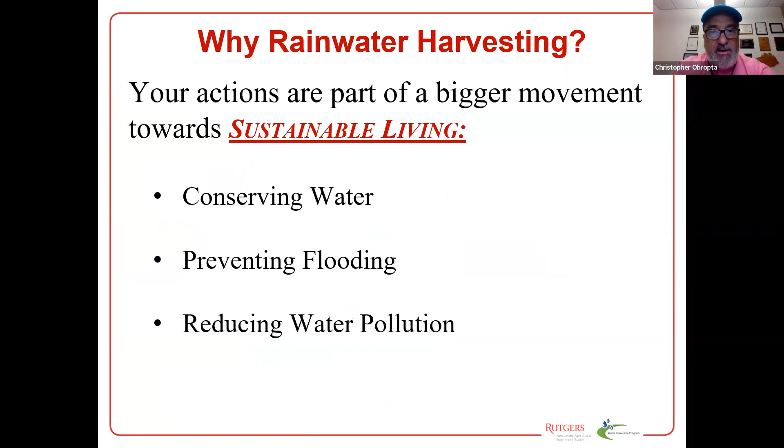So today we're going to talk about rainwater harvesting, and really this is a topic that's become very, very popular. Focus a lot on this whole sustainable living aspect, and we'll talk about each one of these.

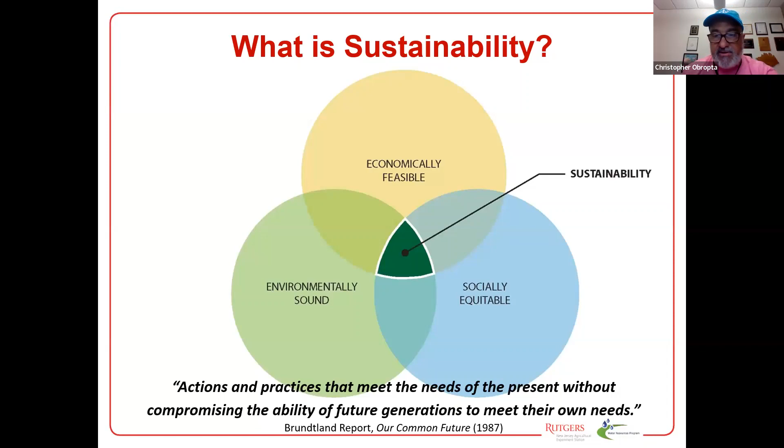Sustainability from a standpoint of what we're trying to accomplish in our lives, I think, has really three components. There's an economic component, there's an environmental component, and there's a social component. Where these three bubbles kind of overlap is in that middle, that's the sustainability. So if you're thinking about the economics, the environment, and the social components, and you're doing it the right way, you can have a sustainable future. And that's what this is all about, rainwater harvesting.

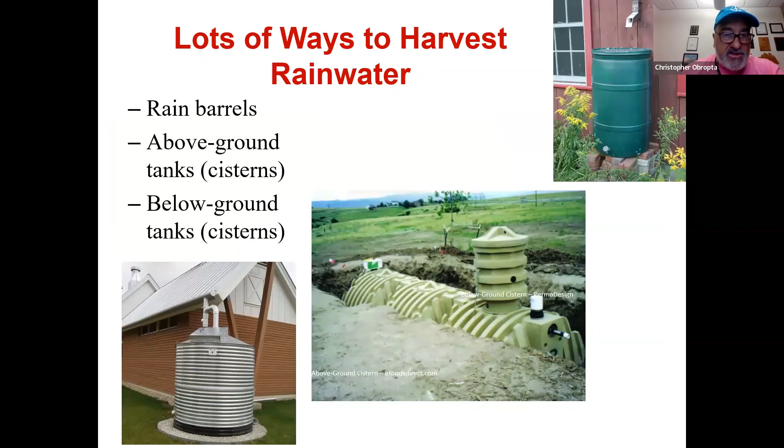So lots of different ways to harvest rainwater. We've got the rain barrels, which probably a lot of you have. We have these underground cisterns, and then we have above ground cisterns. So now the rain barrel is a small feature, it's about 55 gallons. These other things could be much, much larger in size, and I'll show you more about that in a minute. So the first thing we're trying to do is we're focused on conserving water.

New Jersey is a water-rich state. We get over 40 inches of rain a year, but we are also the most densely populated state. About 50% of the water we use comes from groundwater. The average resident uses about 100 gallons per day, and in the summer that jumps up to about 185 gallons per day. So when you couple what the people are using, 9 million people in New Jersey are using, coupled with the 10,000 farms in New Jersey, we have a lot of water being used in the state.

Now, what's interesting is the climate's changing in New Jersey, and I'm sure you've heard about that. One thing we're being told about climate change is that we're going to get more intense storm events, followed by longer dry periods. So for example, it'll rain on Monday, we'll get maybe 2.5 inches of rain, and it may not rain for another 2 weeks. So that's what we're going to see as the climate continues to change, those longer dry periods between the rainfall events. So making rainwater harvesting something that we might want to consider a lot more in New Jersey.

So we're trying to promote this sustainable lifestyle, prevent water pollution. If we're capturing water in a tank and not letting it run across the ground and picking up pollution, carrying it into our rivers, that's a good thing. We can extend the life and reliability of our septic systems and our public and private infrastructure. And then the other thing is it postpones the need to fund bigger water projects in the state.

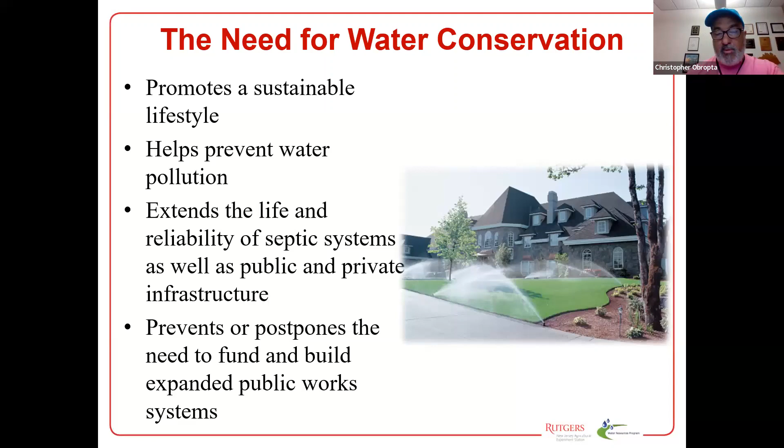So if we can, through conservation and rainwater harvesting, reduce the amount of water we use, then we have to build fewer reservoirs and fewer pumping stations and things like that. So it makes it a little bit more economical on a statewide basis.

So how much water can we harvest from one rooftop? Here's an example of a 40 by 20 foot roof, 800 square feet. One inch of rain gives you about 500 gallons of water. Now the problem with that is your rain barrel only holds about 50 of those gallons, so if you want to harvest all that water, you need something a little bit more than just one rain barrel. But on an annual basis, 42 inches of rain a year, you're getting over 20,000 gallons of water that runs off that rooftop.

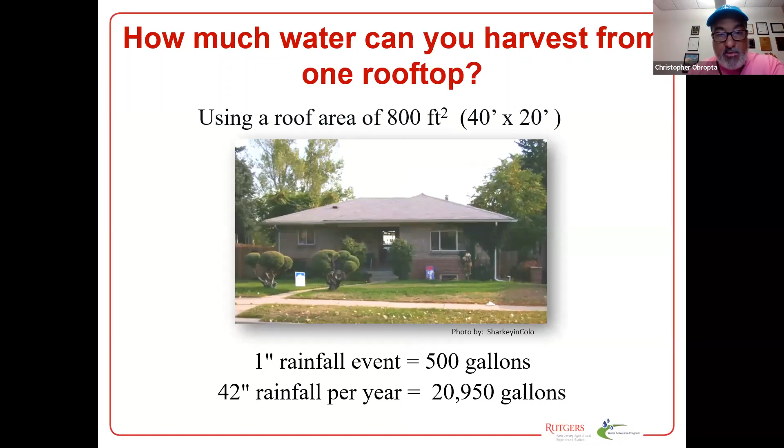Okay, lots of other ways to conserve water. So EPA actually came up with this thing called WaterSense. You know how they have something very similar for energy? So now they have this for water. So when you go to buy a toilet or a washing machine, look for that WaterSense logo, and it tells you that that product is actually better for the environment, conserves water, doesn't use as much. So very much similar to the energy savers stuff that we have.

So when we think about conserving water, adjusting watering for conditions - how many times have we driven through a development and seen a sprinkler going in a rainstorm event? Not a good idea. Using native plants - native plants are adapted to this climate, and we have a talk coming up in June on native plants. Very important, because they use less water, they require less chemicals to survive, and they do much better. Putting mulch around the plants to hold the moisture in place, very important. And then watering early in the morning - deep root watering in the morning really saves a lot of water. When you're irrigating with the sprinklers at noontime, a lot of that's just evaporating.

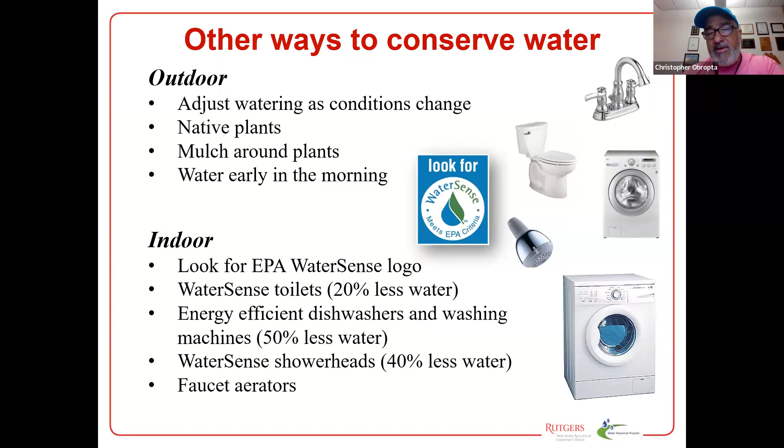You're just wasting water. Indoor, you look for the EPA WaterSense logo, whether it's a shower head, a washer, dryer, or a faucet, and these tend to use a lot less water, a lot more energy efficient. So these are things that we look at - faucet aerators, things like that. A lot of people have this already in their homes. I know that low flow shower head can be a pain in the ass sometimes, but it's good for the environment and uses less water.

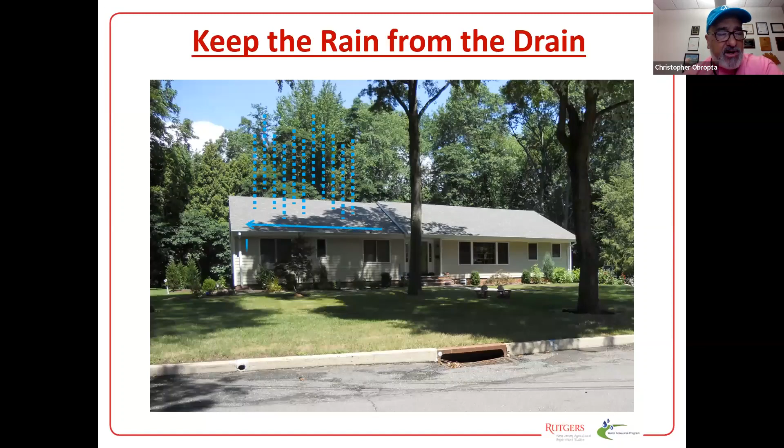So preventing flooding is another issue with rainwater harvesting. Now, like I said, we're not harvesting a lot of water that's going to prevent flooding, but every drop that we can hold back is going to help out. Here's a typical house in New Jersey, and we can see it rains on the rooftop, goes down the gutter, goes down the downspout, it's piped all the way to the road, and then goes into the catch basin. Every drop of water that hits that roof winds up in that catch basin, winds up in a stream.

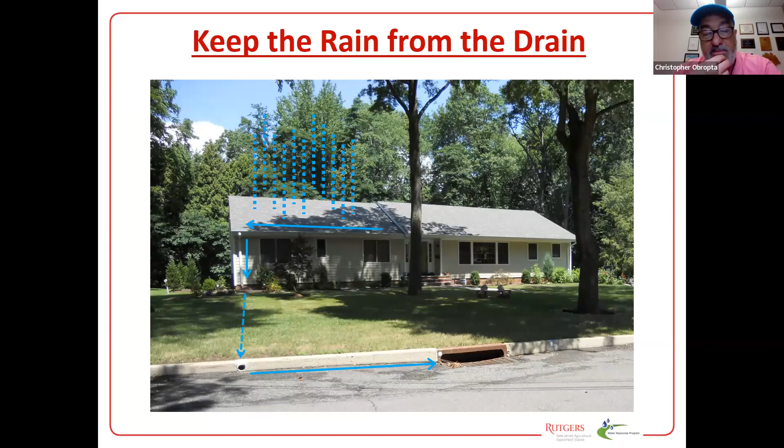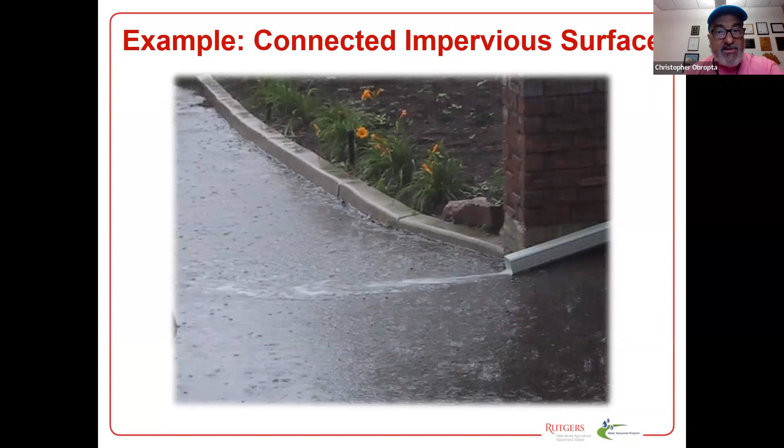We say this roof is directly connected to the stream, so we want to disconnect that. One way is we can cut that downspout off and let the water run across the lawn - the lawn will absorb the first half inch, maybe inch of water. Another way is to install a rain barrel to capture that water. Here's another example where the downspout's going onto the driveway, running down the driveway, going into the road, going into the street. So once again, the rooftop is directly connected to the stream, and we're trying to prevent that - that's a big thing we're trying to do in New Jersey.

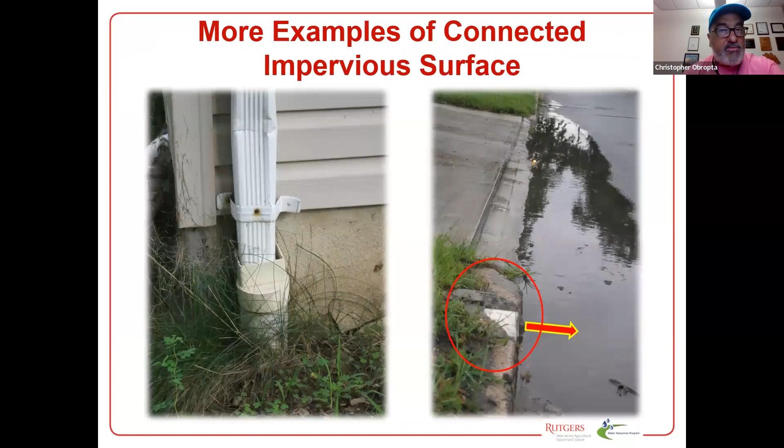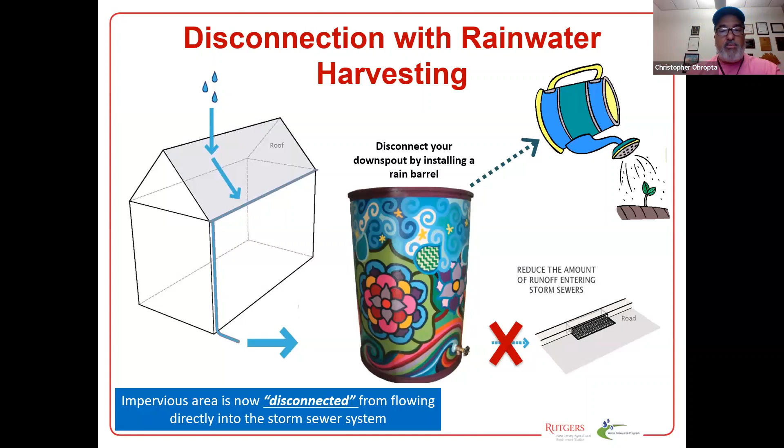Here's another example here, you see it's being piped out to the road. Not only is it a problem in the winter when it starts ponding on the road and flash freezes - you have issues there - but it also deteriorates the asphalt, ruins the road. So if we can absorb that water, the better off we are. So here's one way of doing it, with that rain barrel or cistern, something to that effect. So now it's no longer going to the inlet, it's going into the barrel, and then the barrel kind of overflows onto the lawn. The lawn will absorb the excess water. So that's what we're trying to accomplish here.

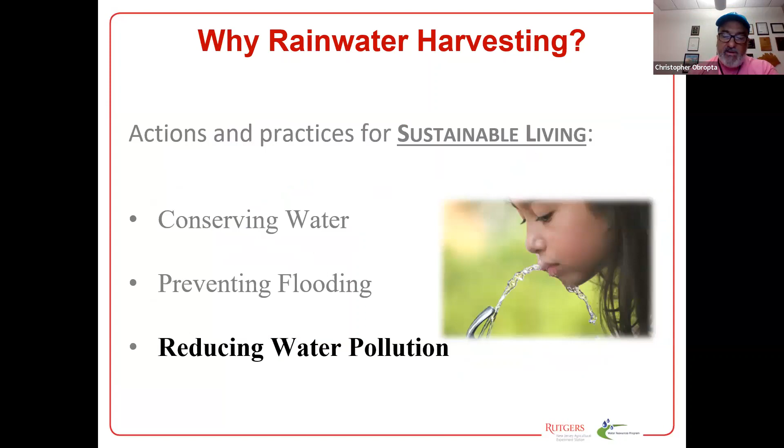The final piece we're looking at for rainwater harvesting is water pollution. The big thing with stormwater is it rains, the water hits the ground, and as it's traveling over the ground, it's picking up pollution and carrying it to the catch basin and ultimately to the stream. By harvesting that water, you're preventing it from running across the ground picking up pollution, and you're using the water instead. It's a way to stop and break up that process by disconnecting the rooftop, having it go into a rain barrel or cistern instead of running out across the lawn and driveway. That's what we're trying to avoid.

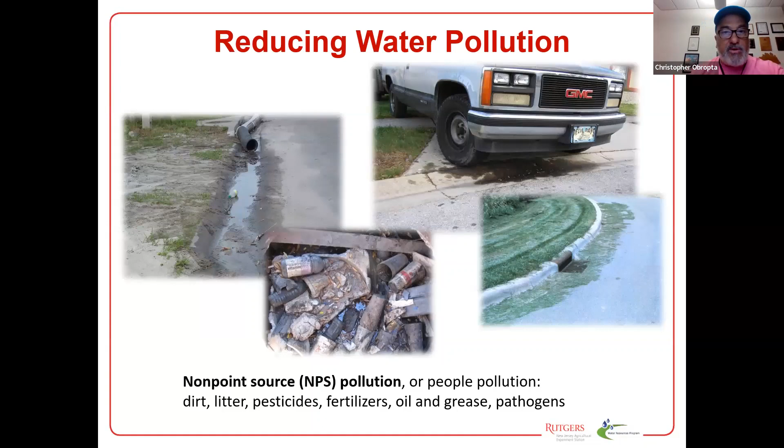Other benefits of rainwater harvesting: plants love the water. There's no salt or chemicals in it, and it has a slightly acidic pH, so it does very well for plants. A lot of people harvest rainwater in rain barrels and use it to water plants in their house, so it's not just outdoor use. Also, during periods of drought you can use that rainwater. With climate change, you're going to get a lot more heavy rainfall and longer drought periods between. So you'll have that harvested rainwater to water the plants, and you won't have to use potable water from the city, which has chlorine in it that isn't good for your plants.

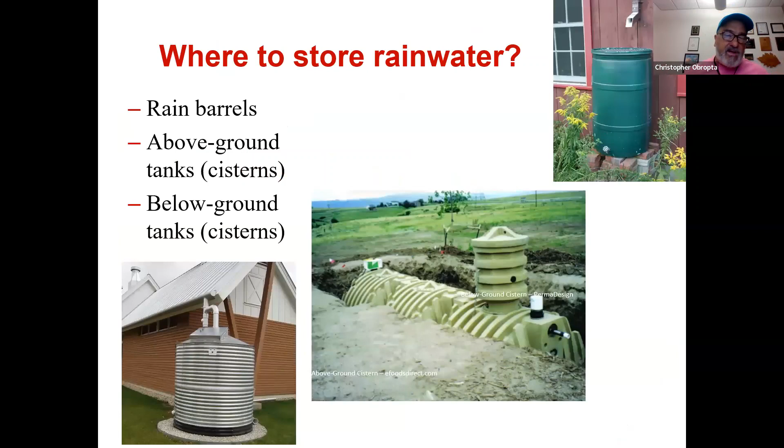So let's talk about rainwater harvesting systems. We showed you the slide already with the 3 different types of tanks we're looking at. There's lots of different types of rain barrels.

We used to do these workshops where people would come in and build a rain barrel—drill the hole, do the caulk, put the spigot in—and there was always some crazy person trying to squeeze two rain barrels in the back of their Prius. By the way, two rain barrels don't fit in a Prius, and I had to follow them home in my pickup truck, which is a bad thing. But we used to do these workshops all the time.

The problem was it's hard to get students to wash out those barrels. They're loaded with pickle juice and things like that—it's a very disgusting job. We found that an undergrad student will wash about 49 barrels before they quit. Then we had to haul the barrels all over the state, which required a trailer and a truck, and it became a very expensive proposition. But if you can find a recycled barrel, it's a great way to go.

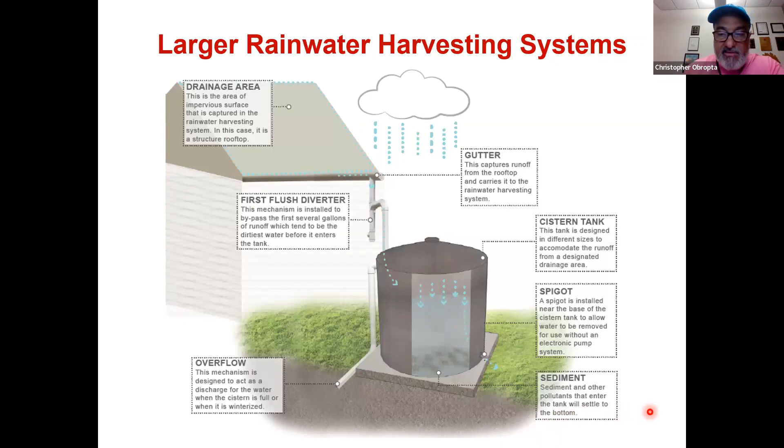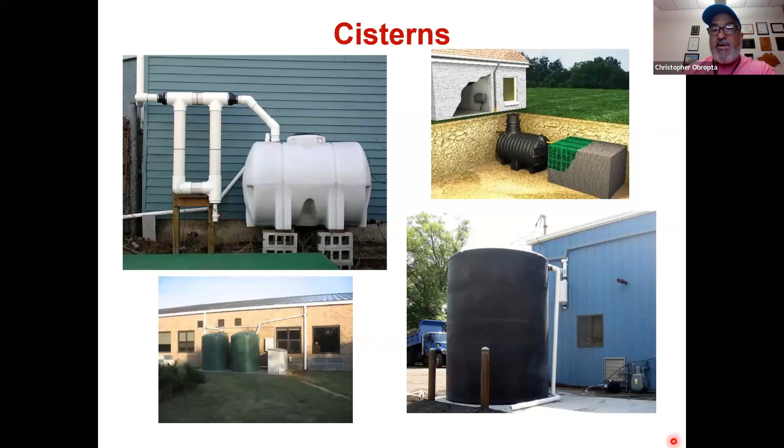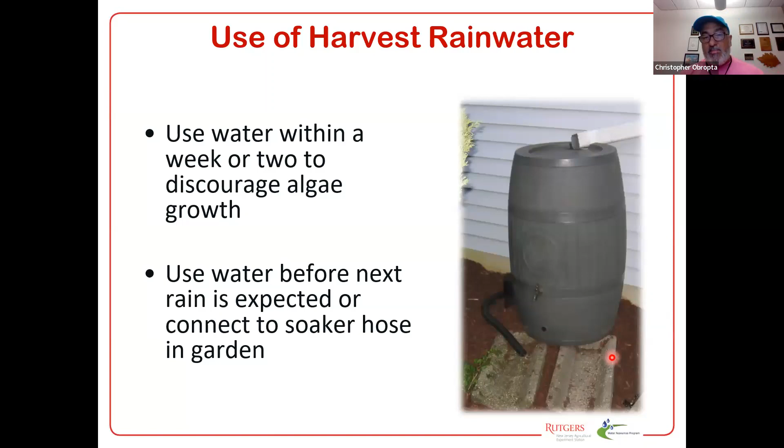A lot of times we're hooking soaker hoses to this. People put these barrels in, hook their hose up, and wonder why it doesn't spray, because there's not a lot of pressure here. So you can use a soaker hose or hook up a pump to it. We have a lot of community gardens where we install underground pumps to take the rainwater and pump it into an irrigation system they can use for the gardens.

You can use this water for a lot of things: watering your trees, shrubs, gardens. You can wash your dog, your car, your muddy feet, anything you want. I joke often that people take the lid off, take their cat, hold it by the tail, dunk it a few times, you can wash your cat in the barrel. It's great. You can also use it in toilet tanks, when the well pump isn't working.

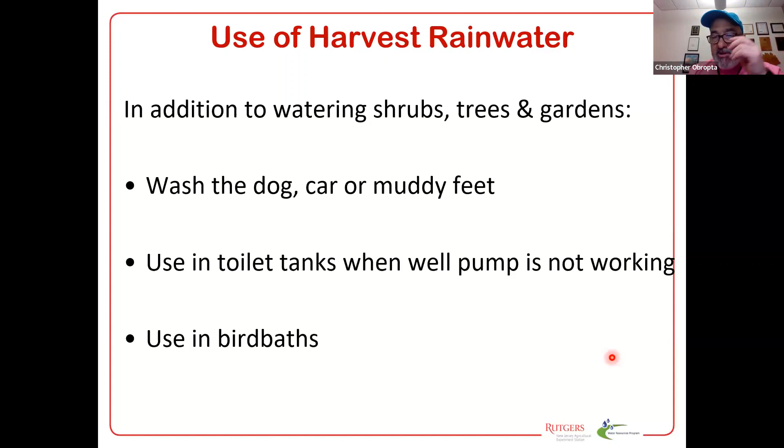I'm on well water, so when the power goes out, I don't have any water because my pump isn't working, but I can take that water from the rain barrel and use it to flush the toilet. Bird baths are another great place you can use it. So this water is useful in a lot of different circumstances. We also use this for vegetable gardens and ponds and things like that.

But we want to be a little careful about what's in the water. If you're using it to water vegetable gardens, we encourage you to water the soil, not the leaves. Having said that, if you're watering your lettuce and get some on the leaves, you're always going to bring that stuff in the house and wash it before you eat it, so usually it's not a problem. But there are pathogens, fecal coliform, E. coli, that could be settled out on the roof from bird traffic, and that could really contaminate the water and get you sick if it gets on plants you eat.

The other thing we see is petroleum hydrocarbons that can come from the shingles of the roof, as well as things like zinc, lead, chromium, and arsenic. These metals also come from the roofing material or from the nails used to put the roof up. So sometimes we do some testing on this. Michele Bakacs, one of our county agents, along with a few others, did a whole study on rainwater harvesting and rain barrel water and did some testing on it. There's a fact sheet out about that, I'm sure Bill can give you access to.

So caring for your rain barrel or your cistern, you really need to make sure there's screens on it, because if there's not a window screen covering the openings, you'll get mosquitoes breeding in there, and that's a horrible thing. So you want to be very careful to make sure that screen is on there. Replace it every couple of years, because the window screen will eventually deteriorate and tear apart.

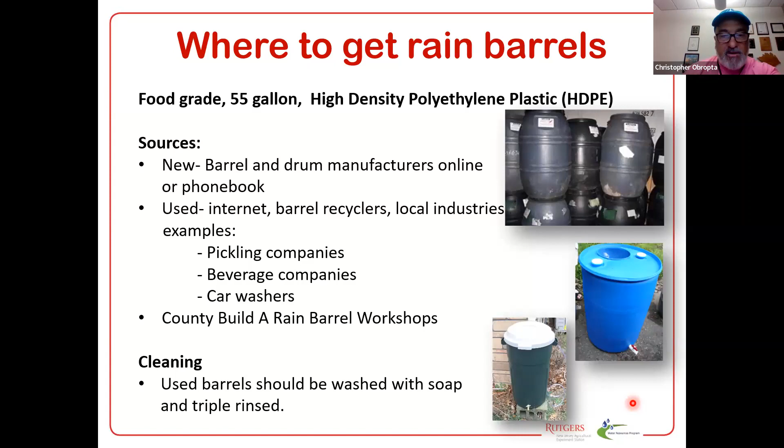Now, not a lot of houses have this. We see a lot of this out in the Southwest, where they have very little rain - out there they get about maybe 8 or 10 inches of rain a year, where we get 40 to 50. So they're harvesting a lot of water. A lot of them have a dual piping system in their house to take recycled water and bring it into their house to use it to flush their toilets and things like that.

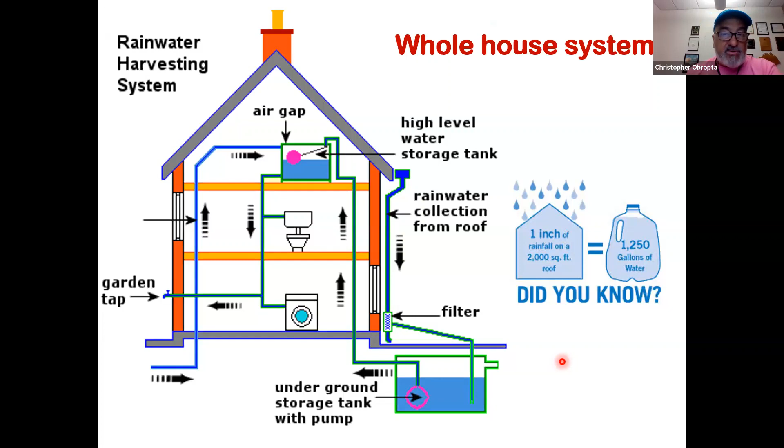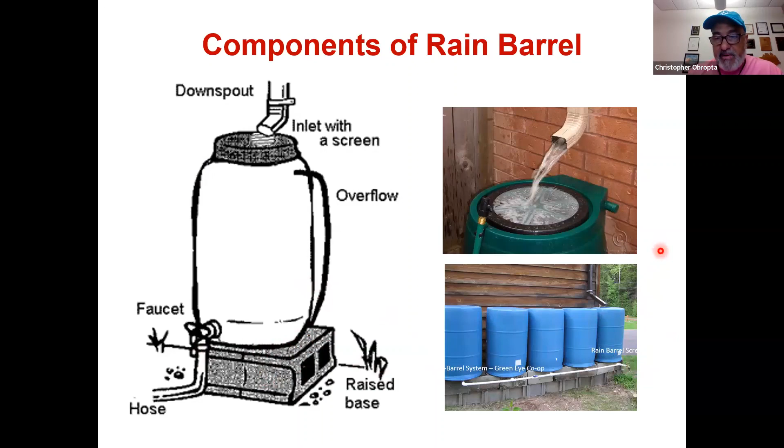You can see here, in this case, they have a daisy chain of barrels. So now instead of just having 50 gallons, they've got 250 gallons of storage because they have 5 barrels in series, and the spigot's at the end. This fills all the barrels up uniformly, and then you have a spigot down here that draws water from those barrels. It's very, very nice if you want to have 5 barrels sitting next to your house like that. Probably put a little screen in front of that if you wanted to.

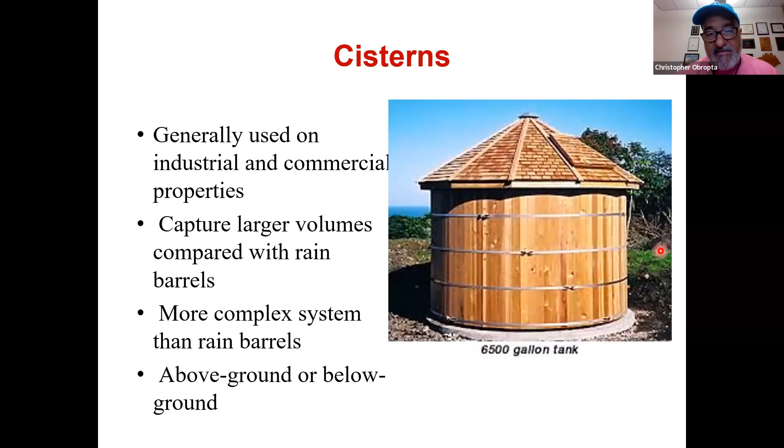Cisterns are a little bit bigger, mostly for industrial and commercial properties. Agriculture is a big place - we see cisterns capturing large volumes of water. This is a beautiful tank here, a cedar tank, 6,500 gallons. It's a little bit more complex than a rain barrel, and it can be above the ground or below the ground.

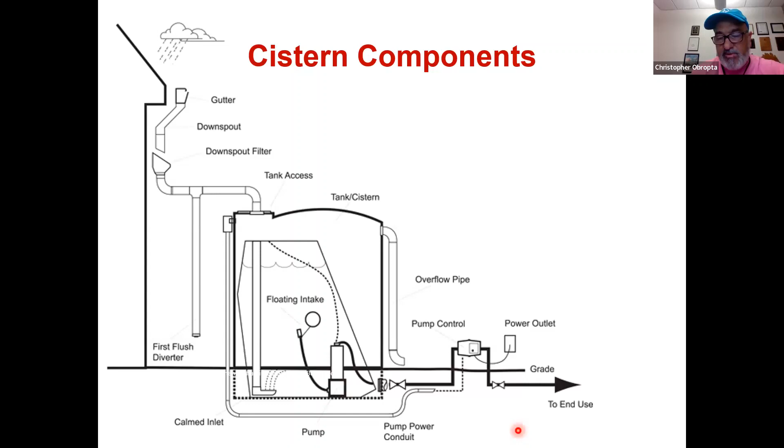One question that always comes up is, do I need a permit for this? Often you need to just call your local building inspector and see if the building code allows you to do rainwater harvesting and reuse the water in the house. A lot of people find there's really no building codes that prevent you from harvesting rainwater in a rain barrel or a cistern to use it to water your garden. But if you want to start using that water and pumping it back into your house to flush the toilets and things like that, you have to talk to the plumbing department and the health code to make sure you're able to do that.

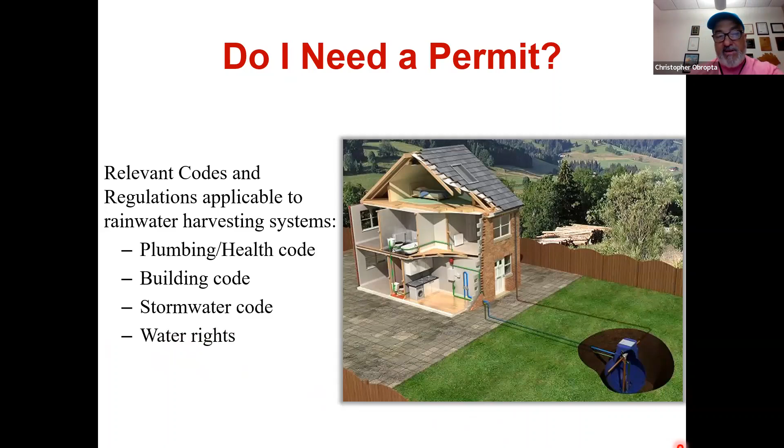This last thing here, water rights, is interesting. There was a big problem out in Boulder, Colorado. People were starting to harvest rainwater from the rooftops, and it was illegal in Boulder because that water belonged to downstream farmers. When it landed in Boulder, it went into the river, the Colorado River, and went downstream - it was their water, and these people were stealing water from those downstream farmers. Since then, they have passed ordinances and regulations that allow homeowners to do that to a certain extent. So water rights is really a big issue out west. We don't really have that here on the East Coast because we get a lot of rain here.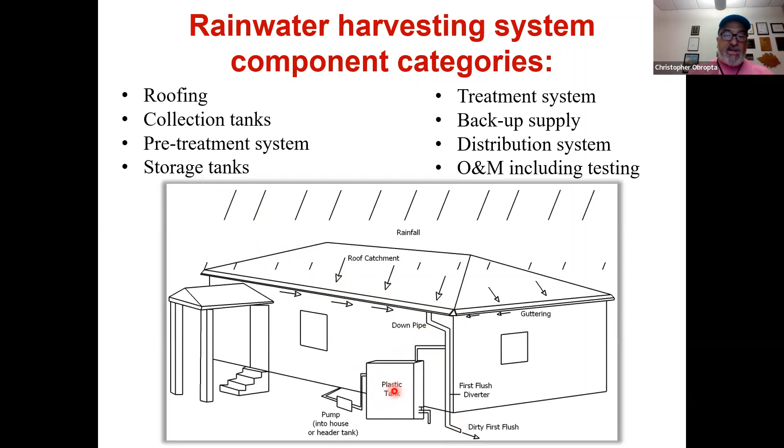So there are different components of the system. We'll go through some of these for a few minutes. You got the roof catchment, so the rooftop drains to the gutter, which drains to the pipe. You have these collection tanks where you're collecting water. You have a pre-treatment system, usually some sort of first flush diverter. Then you have storage tanks - you might collect the water in this tank and then pump it to another tank to store it in. So we have lots of different components here, and we can start looking at some of these. Pre-treatment can be very simple.

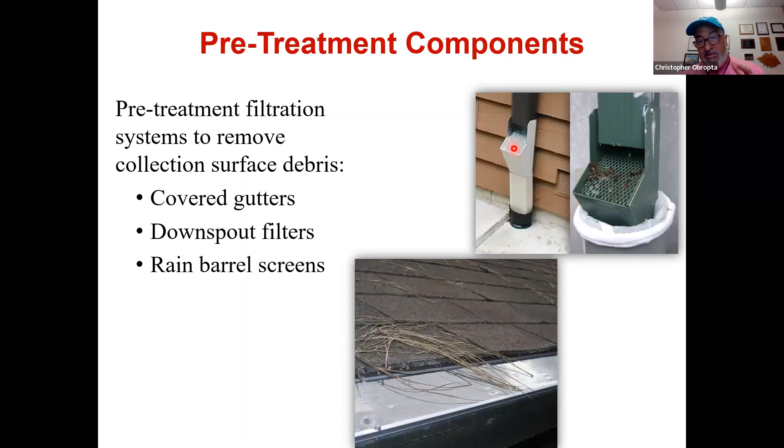It could be these gutter guards that you put on your gutters, or just a screen. This will get clogged with debris, and you have to clean that every once in a while, but it's better it comes in here than goes into your tank. Very inexpensive system, but once again, you've got to make sure you clean this out so it doesn't freeze in the winter. Another issue.

Roofing is an issue. We think about where we can harvest rainwater from: asphalt shingles, treated wood, waterproof wood, galvanized steel, all have different chemicals associated with them. So we worry a little bit about the pH, whether the water is very acidic or getting changed because of the roof material. We're worried about heavy metals, copper, zinc, maybe the nails used to install the roof. Nitrate and phosphorus are also things we worry about. Most of these just settle out of the atmosphere and land on these hard surfaces and wash off.

And then we worry about painted roofs. A painted enamel metal roof or slate roof is preferred to any of the other types of roofs. So a metal roof is much better.

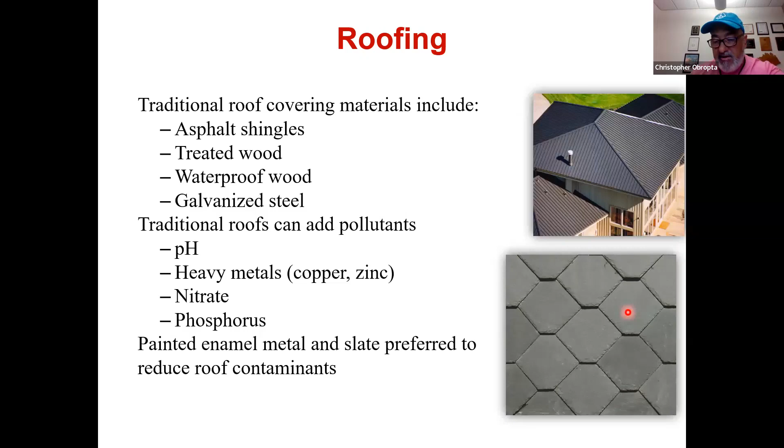I've been down to Puerto Rico and the Virgin Islands. When I first started at Rutgers, I was given this job as a regional water quality coordinator for EPA Region 2, through a U.S. Department of Agriculture grant. EPA Region 2 is New York, New Jersey, Puerto Rico, and the Virgin Islands. So my first six months on the job, I had to go down to Puerto Rico for a week and the Virgin Islands for a week to see their failing septic systems and their rainwater harvesting systems. And yeah, it was a horrible thing I had to do. I mean, I did it because the job asked me to. Sitting on the beach in the Virgin Islands thinking about septic systems was very, very difficult for me.

Storage tank types: there are lots of different ones. Plastic is the most common, a high density plastic. Steel lined with a membrane is another one, so we're careful about steel tanks because they'll rust, so you have a membrane inside. Concrete tanks are pretty common too. Most of our septic systems are concrete tanks, but we can also use a concrete tank to store water and use it. These tanks can be indoor or outdoor.

They can be automatic or passive. Automatic is interesting. In Australia, they've got a lot of these big cisterns hooked up to their cell phone. So if they're at work and hear it's supposed to rain later, they can call their tank and open up the outlet to let it slowly drain out during the day, so when it rains at night it can store more water in the tank.

I had a colleague in North Carolina who couldn't afford that type of system. So he did some engineering calculations and figured out that if he drilled a 3/8 inch diameter hole in the bottom of the tank, after it filled up following a storm event, that would let the water drain out over the next two days so it'd be ready for the next storm. The problem was people saw the water dripping out and kept sticking gum and tape in there trying to clog the hole, which screwed up what he was trying to do. He actually had to put up a sign saying please don't block this hole, this is meant to be here. It was his way of automating it, but in a passive way.

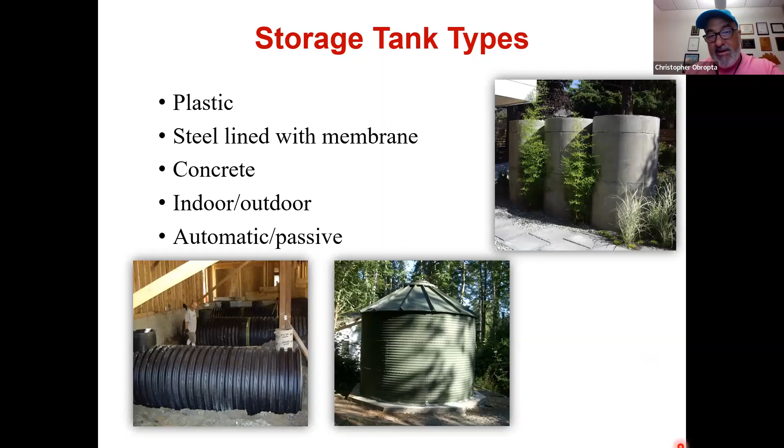There's a lot of commonalities between having a rain barrel and a cistern system. The collection surfaces are the same, and the pre-treatment devices are basically the same, just screens or filters. A backup supply is often used too. If your rain barrel is empty, your backup supply is the water source of your house, and the same is true with your cistern. So you always have some sort of backup supply of water.

The cisterns are much larger in nature. They can be used for whole house distribution systems, like I showed you earlier. You can also have more sophisticated systems where you filter the water and use it in different ways. There's a big office building in New York City called Solaire that has a big treatment system in the basement. All the water goes into that system, where they treat the wastewater and reuse it. They also have a stormwater system that collects stormwater from the roof and reuses that water too, treating it to a much higher level there in New York City.

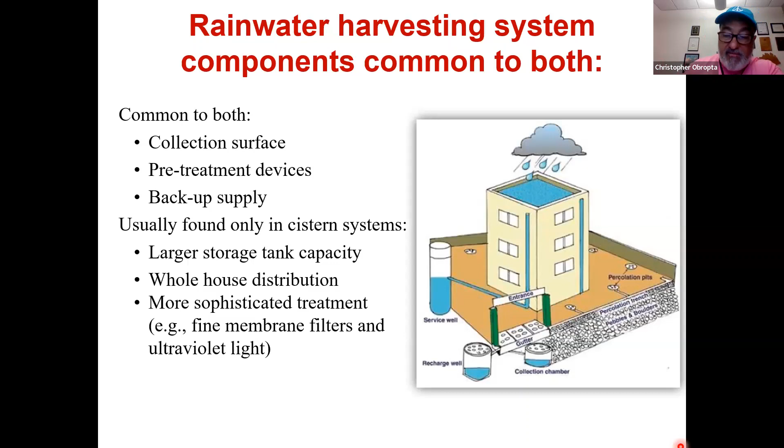Basically installing this stuff is not really that complicated. What you have to do is be a little worried about when you cut this downspout to put it in the barrel. That's great, but then come December when you want to disconnect it, you have to be able to hook this downspout back up to where it was going. So you have to be careful and think about installing it for the warmer months versus reconnecting the downspout for the colder months.

We often worry about the tank size and the piping we need. A lot of the piping we're using is plastic PVC piping. We worry a little bit about the filtering we're doing, and then installing that first flush diverter - how big does that need to be? So there are lots of different issues here when we're installing things.

Health and safety issues are usually addressed. They have to be very careful about that, making sure no one gets hurt, especially if you're doing an underground system. You want to make sure that whatever you're digging out isn't going to collapse on you. It's always an issue - you want to always have access to the system.

So even if you're putting it underground or using a big above-ground system, if you want to get the sediment out of the bottom after it accumulates, how are you going to do that? Well, there's an opening on top - can you get in that opening, get in the tank, and vacuum that out? Is that something you can do? So there are different ways you have to look at how we have access to it, so the O&M, the operation and maintenance of it, is very important.

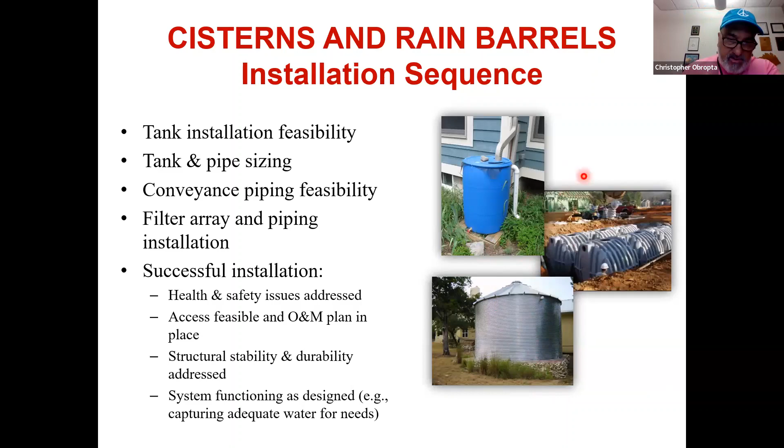And the structural durability is important. We see here you've got a rain barrel on a little wooden platform. Eventually that wood's going to rot away and it's going to collapse. It's probably much better to put it on concrete blocks. So thinking about how long things are going to last is very, very important.

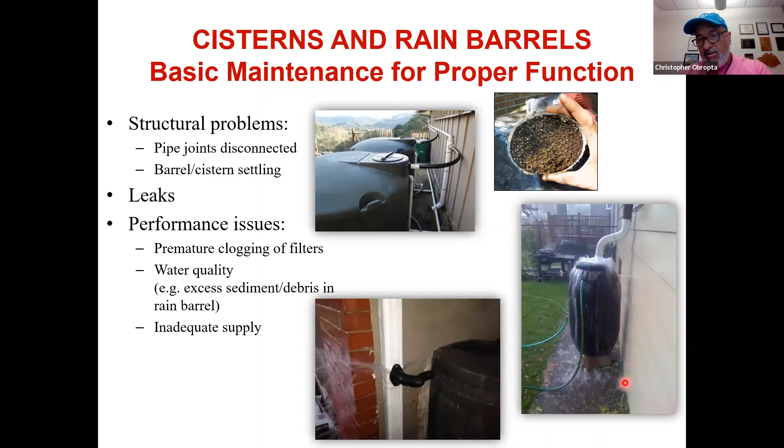Now, this usually isn't a problem if the water's coming down and going away from the house, but sometimes it'll go down along the foundation and could flood out your basement. So that's an issue there.

For cisterns and rain barrels, basic maintenance includes inspecting it, making sure it's not leaking, making sure sunlight isn't getting in so you don't get algae growing, and checking access points for vermin - really more mosquitoes than anything else. Even that overflow hose that may be 5 feet long, you still have to put a little screen on the end of that hose where it goes into the barrel so mosquitoes don't crawl up the hose and get into the barrel. We've actually seen that happen.

Maintenance of outlets a few inches above the bottom of the cistern means making sure you have access to those spigots on the bottom. There's also inspection and maintenance of overflow protection - when it overflows, do you know where it's going? Is it safe, or is it like that barrel we just saw where it's overflowing and going down the side of the building into the foundation?

Chlorination of the barrel - the Rutgers fact sheet recommends you put a little bit of chlorine in the barrel every few months to make sure you don't have any of those pathogens growing. And finally, drainage and removal of sediment from the tank.

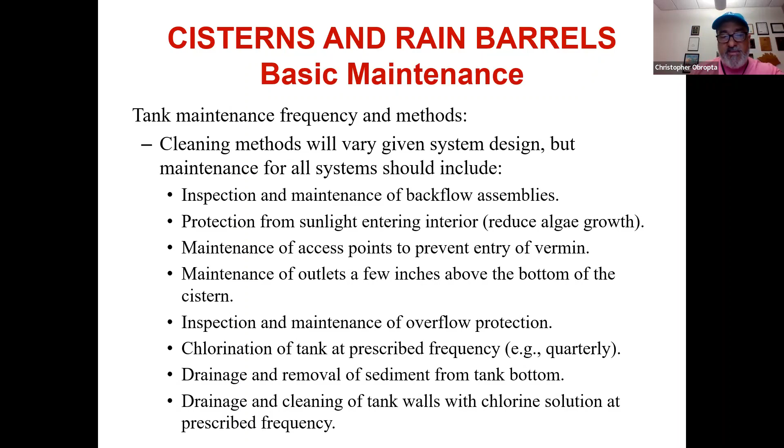Once again, drain it down, get in there, vacuum out that sediment. Usually it's not too bad because you have those filters going in, so that may be something you only have to do once every few years. But that's something always to think about. And actually cleaning the inside of the tank, sometimes you might want to do that because it can get a buildup of grit and debris on the inside.

So that's it. I want to show you a video too, if I can. Is that okay if I show a video? What do you think? Yeah, you're fine, Chris, there's some time still. Okay, let me try to figure out how to do that, because I used to know how to do this, but let's see.

Can you guys see that? We can see it, it says homestead economics. I don't know what that really means, but okay, tell me if you could hear it.

Is that good? Hey there guys, welcome back. Today I want to take you on a tour of my whole house rainwater harvesting system. It's about 11,500 gallons in capacity and accounts for 90% of my family's water needs. It's been working well for the last 6 years, and overall it's a pretty simple system. Let me grab the camera and I'll take you around and tell you a little bit about it.

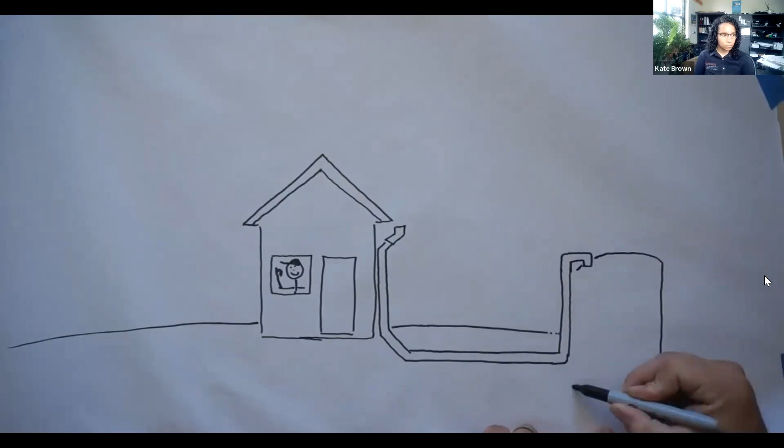To start the tour off, we'll begin in my front yard. Actually, let's begin with a diagram so you understand how this system works. You'll notice as I walk you around my house that many of the downspouts go directly into the ground. This is known as a wet pipe system, meaning there's water in the pipes during the entire process of transferring water. There's no pumps required. Basically the water transfers because there's a difference in the level of the inlet port and the outlet port. I'll show you how the water flows, and then you'll see the difference in level.

Get some great artwork in there. So you'll see there's approximately the level of the inlet, and then there's the level of the outlet. The difference between these levels is what moves the water.

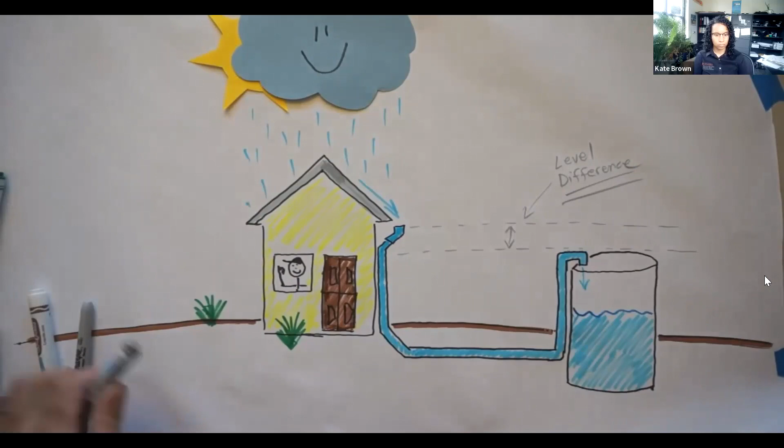So now that you understand that, let's go for the walk around tour. To start, we'll begin with the largest component of my rainwater harvesting system, and that's my corrugated metal roof. From the roof, the rainwater passes through a series of gutters and PVC pipes to one of 4 eventual holding tanks.

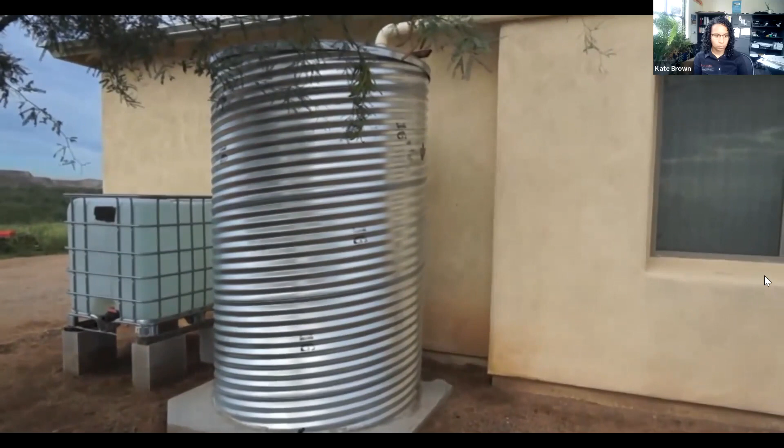The first of these tanks is my 1,100-gallon culvert cistern. This is definitely the coolest looking tank, and that's why it's on the front side of my house. It receives its water from gutters on either side of my garage and is eventually fed by this PVC pipe that you see over the garage window. And if you're wondering about the IBC tote just next to the tank, it's simply there for added capacity.

Now, as we move closer to the main portion of this rainwater harvesting system, I want to point out that we still find good uses for standard rain barrels as well. This one's set up in a corner that sometimes has water skip during very hard rains, so we like to collect every little drop as much as possible.

Now moving across the yard, we'll come to the first of 7 connected PVC downspouts that comprise the majority of our water harvesting capacity. All of these downspouts are connected to a 4-inch PVC pipe that runs underground and eventually all the way to our main rain collection tanks.

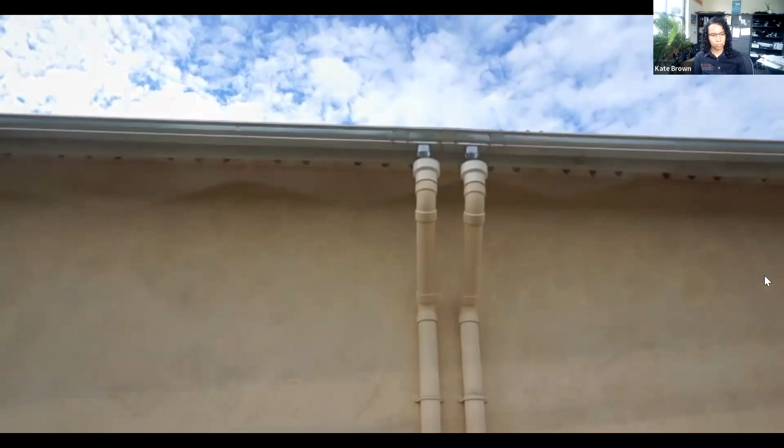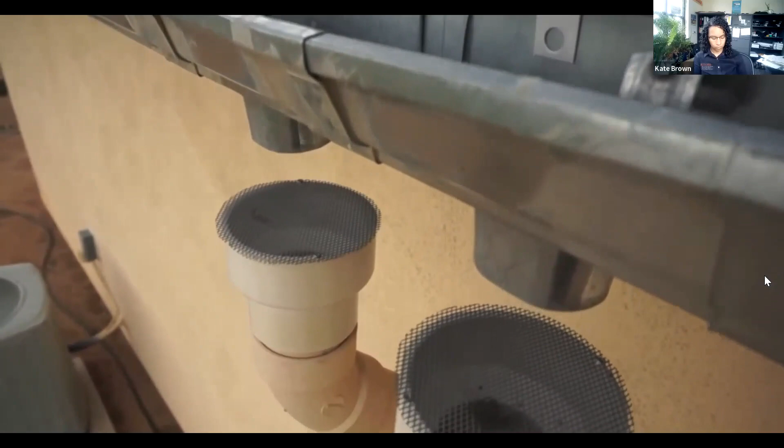Here's number 2 and number 3 downspouts. They both collect from either side of this run of gutter. Here's a closer look at what they look like from up top. The tops of the downspouts have bell couplings, and I've simply screwed standard aluminum wire mesh there just to keep bugs and other debris out.

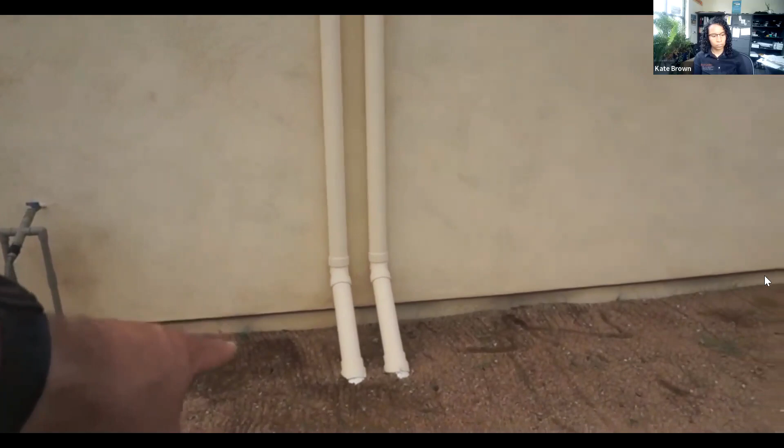Now we'll move on to the 4th downspout, which collects water from half of the gutter that runs along the backside of my porch.

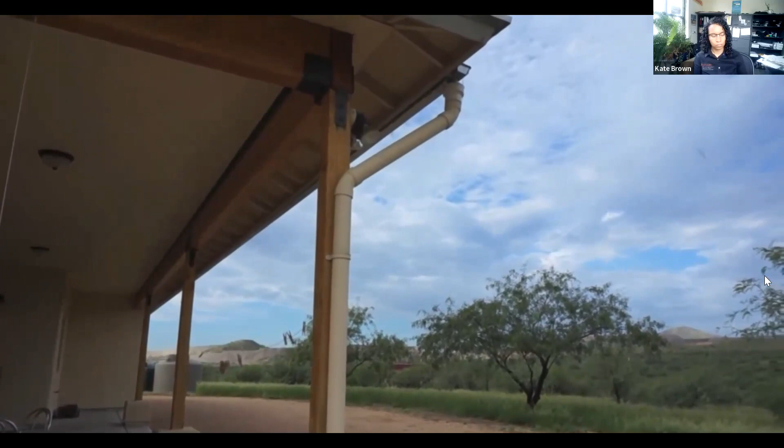From here we'll move on to the 5th downspout, which collects water from 2 opposing sides of gutters on either side of this portion of my roof.

We'll continue to follow the underground line on to the 6th and 7th downspouts. These collect water from the portion we just passed, and the one on the right collects water from the section of gutter over the garage.

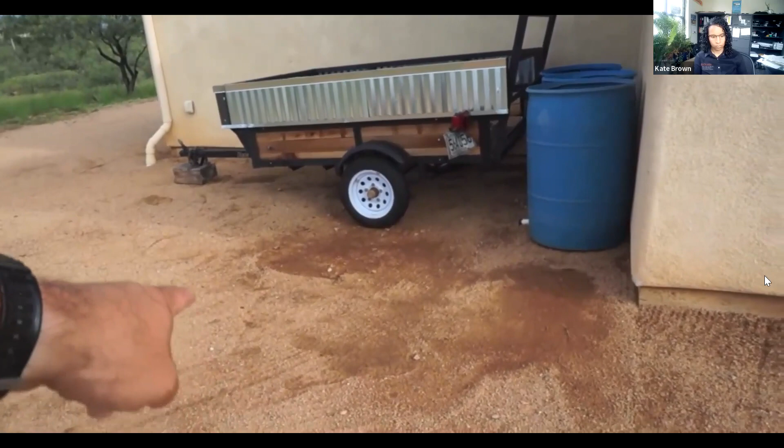The final path of the water, after being collected in all 7 downspouts, occurs underground in the 4-inch PVC line that eventually makes its way to a 5,000-gallon tan rain tank.

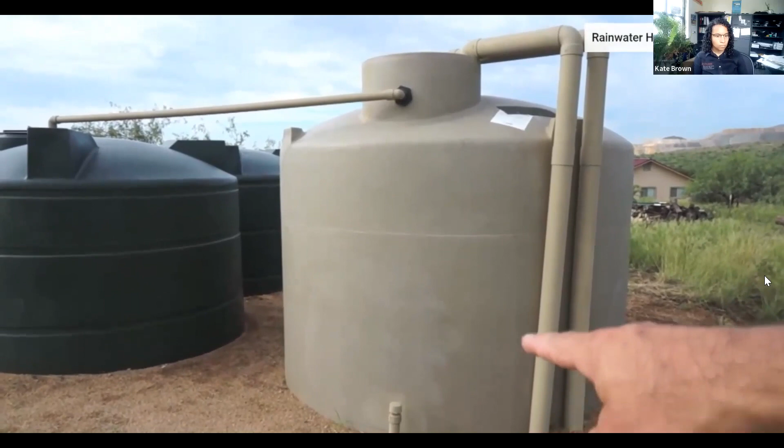This tank is approximately 13 feet tall, with about 5 to 5.5 feet buried beneath the ground. The horizontal pipe at the top of the tanks allows for the transfer of water by two different methods: one is by simple overflow at times of full capacity, and the other is by using a small electric pump.

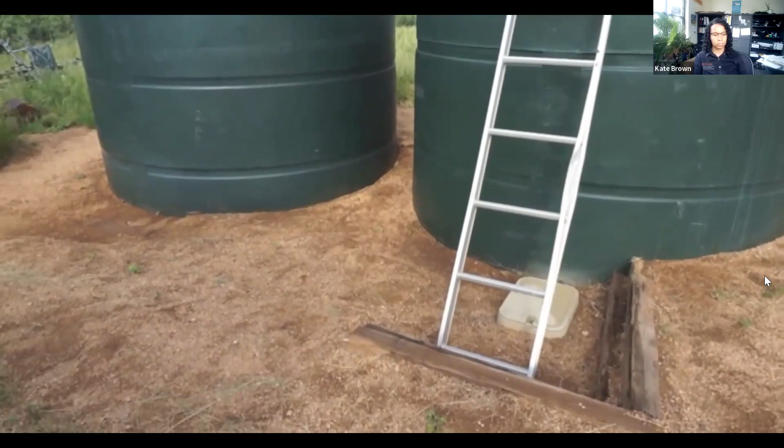Now we'll move on over to the final two tanks in the system, which are the ones that are actually connected to my house. This one is 3,000 gallons, and the other one is 2,600 gallons. Currently, both tanks are plumbed together, and when the house pump draws water, it's drawing from both tanks at the same time. However, if I ever need to do maintenance, I can easily shut down one tank and have the pump draw off of the other one.

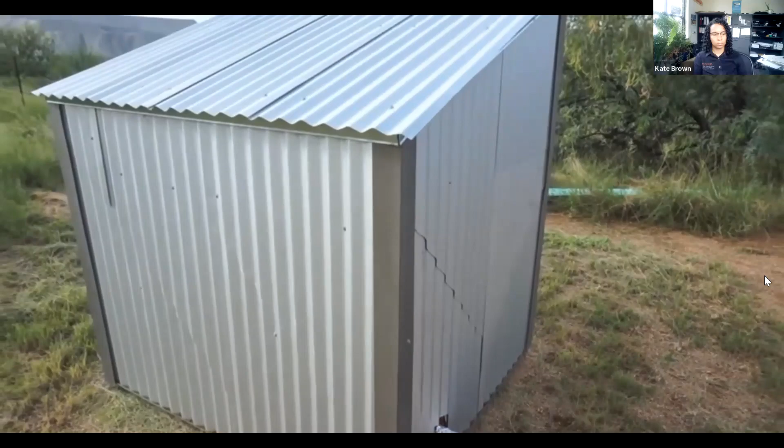This structure is my pump house. It's what actually holds my pressure tank and my pump that supplies all the pressure for my household needs. If it looks familiar, it was built almost entirely from scraps from my building process, and it's clad in the same corrugated metal that my roof was made out of.

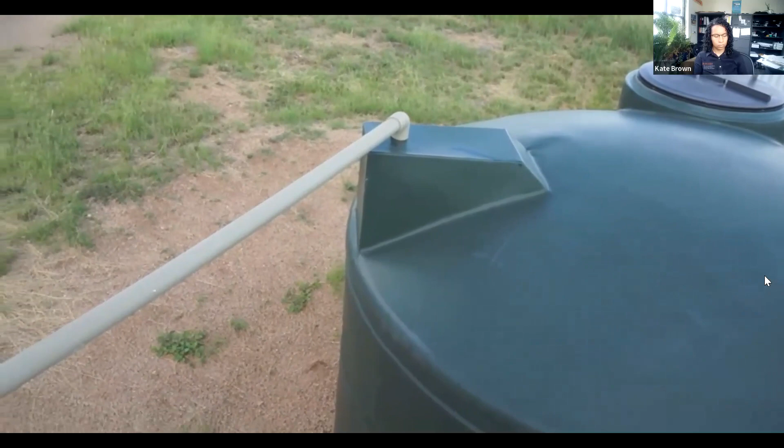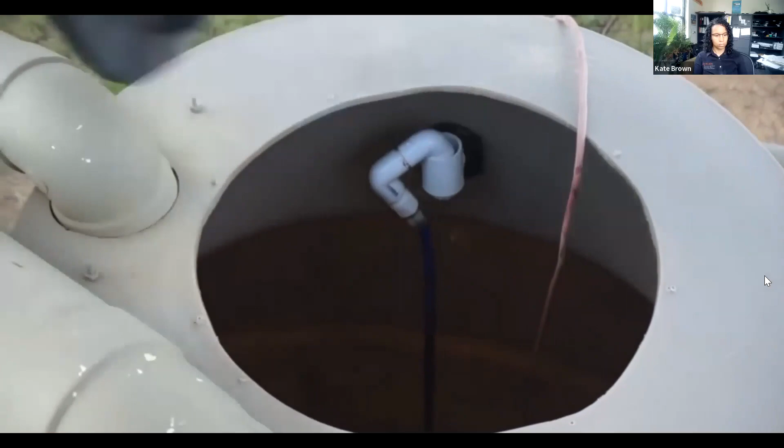To transfer water from my rain tank to my other tanks, I simply use an electric pump, a short length of potable water hose, and a PVC fitting to redirect the transferring water through the overflow pipe that already exists between the tanks. Here's what it looks like.

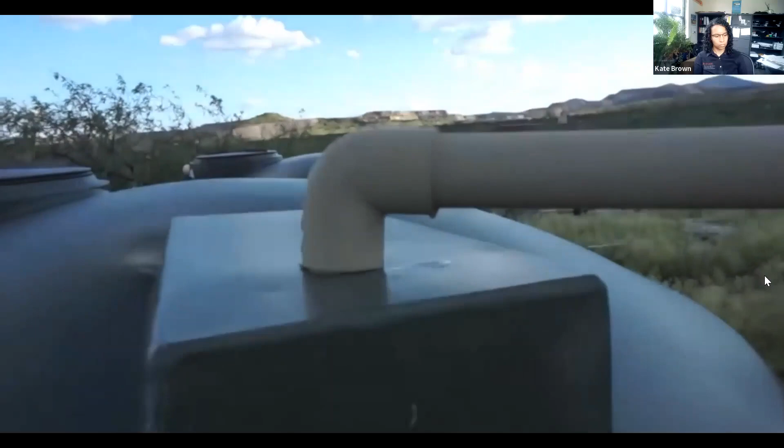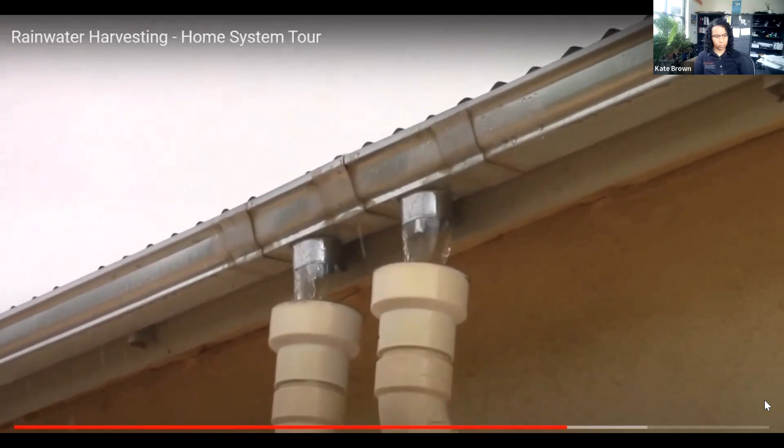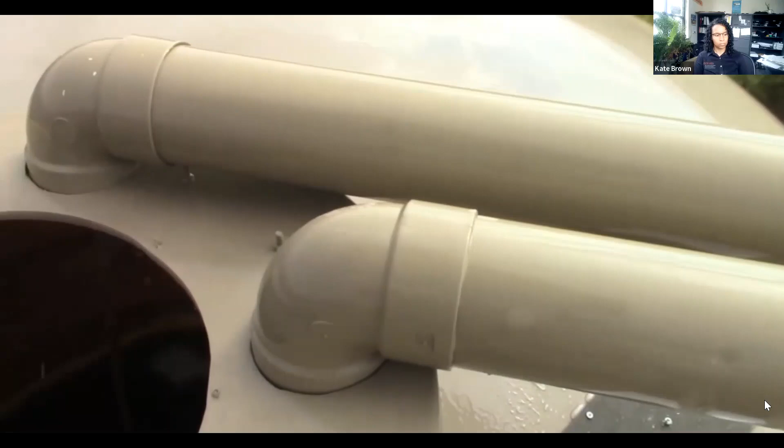Here's some footage of a very light rain that we had during our recent monsoon. It's just barely more than a sprinkle, but as you'll see here at the rain tank, it still provides a substantial amount of water that's flowing into the tank.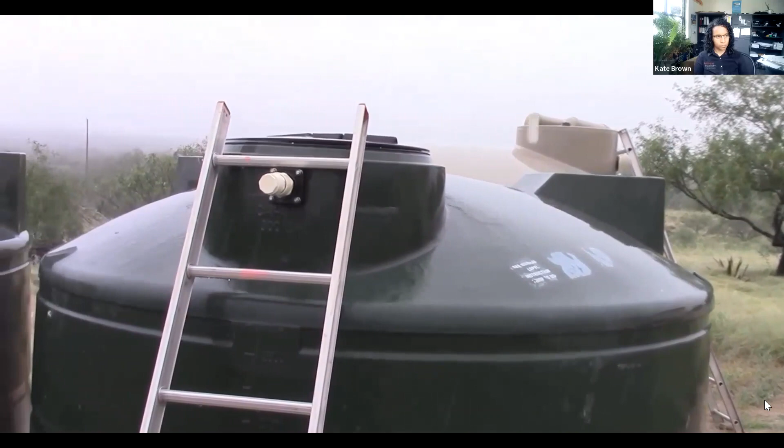And here's some footage of a much more substantial rain that we got later in the monsoon season. You'll see all 3 tanks are overflowing and I absolutely have no more capacity.

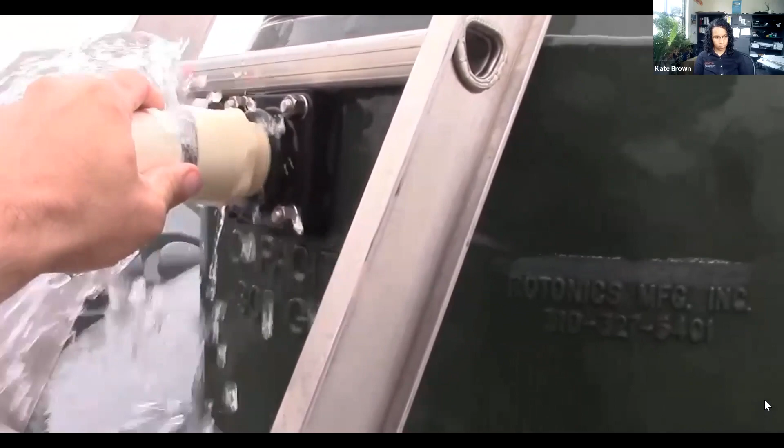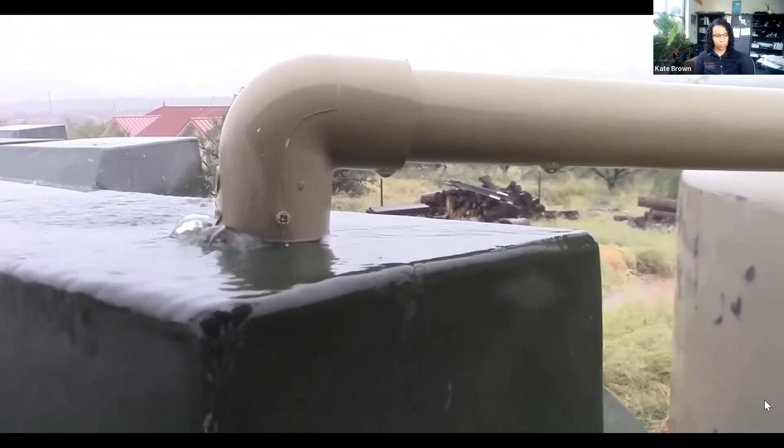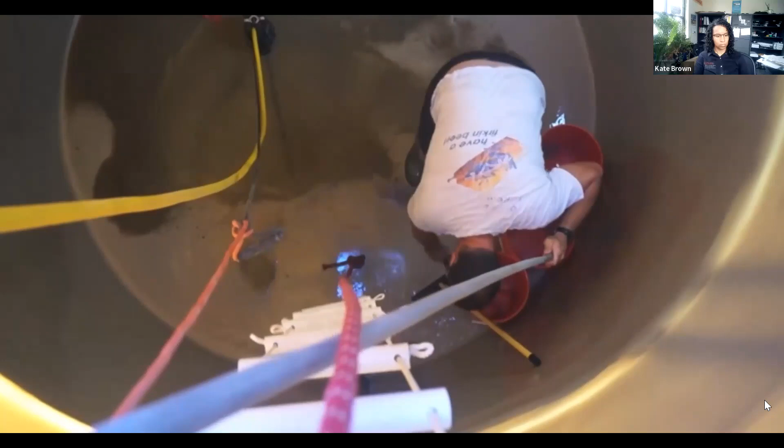At the end of each rainy season, there's really only one tank that ever needs cleaning, and that's my rain tank. It tends to collect a little bit of the dirt and sediment from the roof, but pretty much nothing else. The rest of the system does a good job of keeping everything else out.

Truly, the most difficult portion of this process is just getting in and out of the tank. If you look down at the bottom of the screen, you'll see my rope ladder that I made out of rope and PVC pipe. It works pretty good, but it is still a little bit hairy to go up and down.

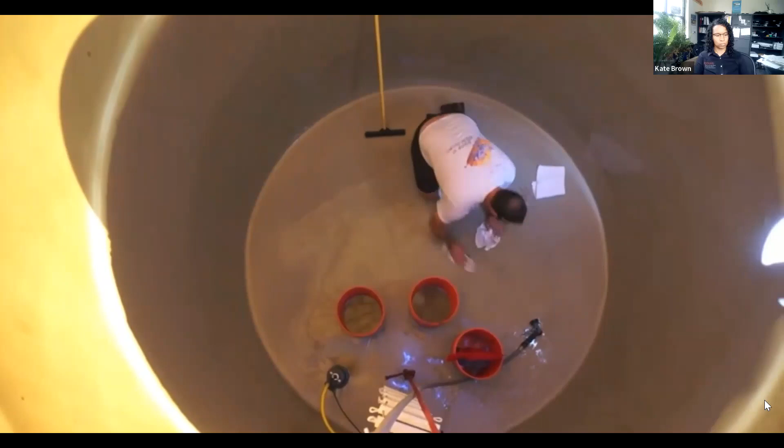And this is how baby whales are born.

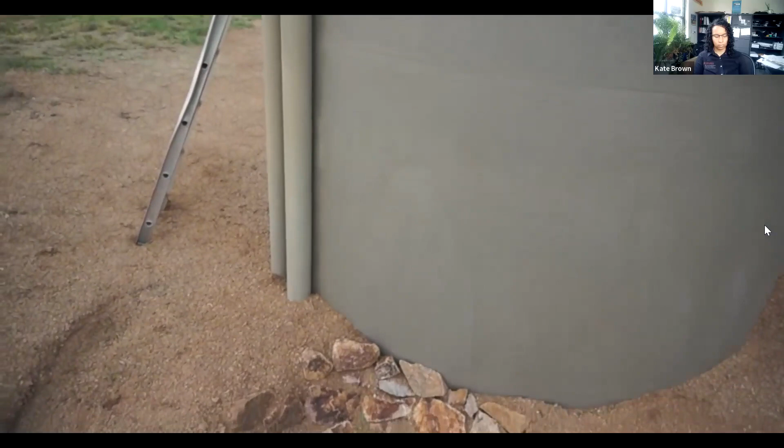In addition to keeping the rain tank clean, I also like to flush out the entire system of PVC pipes from time to time to reduce any sediment or dirt buildup. I can do this from one of two drain pipes, this one right here, or this one right here, located right next to my rain tank.

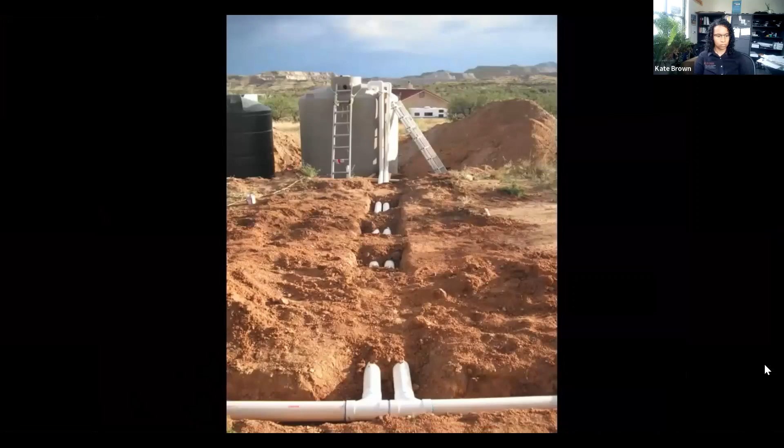So there you go. What do you think? Pretty cool, huh? Yeah, I'm impressed, Chris. You are an extension professional. Yeah, see that? See how that works? So, you know, I don't know.

This stuff is pretty inexpensive. The tanks themselves usually cost about $1.50 to $2 a gallon. So if you need a 1,000-gallon tank, you're going to spend $1,500 to $2,000 for the tank. A lot of the tanks that people use are stuff that they find and recycle - I've seen a lot of that being done. PVC pipe's pretty cheap, about $1 a foot. So you can really build a system yourself, and you can see this guy went a little bit overboard, but you can also see he is in the Southwest someplace. He talks about rain as monsoon, so he's got to be in Arizona, New Mexico, someplace like that, or Southern California. So I think that's another aspect of it.

But this is kind of the future. If you're a homesteader like this guy is, seems like something pretty cool to do. So when you guys harvest every drop of water on your property, give me a call and I'll make a video about you. Okay, so be good.

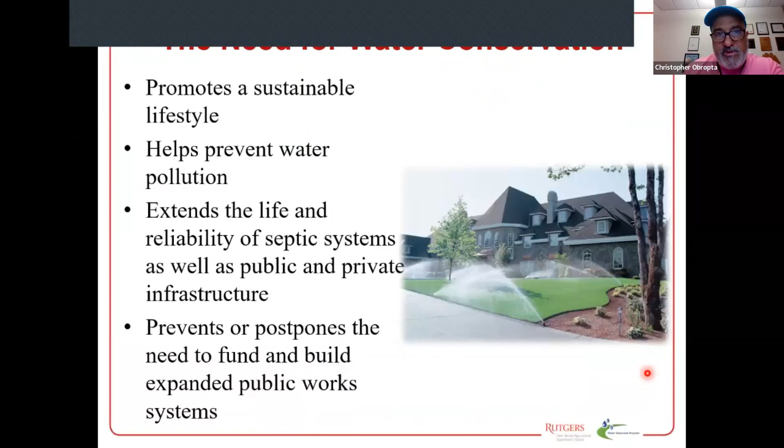Leslie in the chat is asking if you could put up that slide with your contact information again, and she was also interested in the slide that showed the amount of water a roof can collect, that conversion. Let's see what we got here. Okay, your 20,000 gallon per year slide... yes, this slide here, I think, right? There you go.

So what are your thoughts now that a lot of roofing materials are going towards being impregnated with algae control and stuff? Is that going to be a no-go? I don't know, I think there needs to be some testing done on that, Bill, because I'm not sure about how that's going to work. So yeah, I'm not too sure about that.

I'm also looking at how a lot of people have solar panels on their roofs now too, and how does that affect it? Because there are different materials in that solar panel, and I'm worried about that stuff leaking into the tank, into your water tank. So that makes me a little bit nervous.

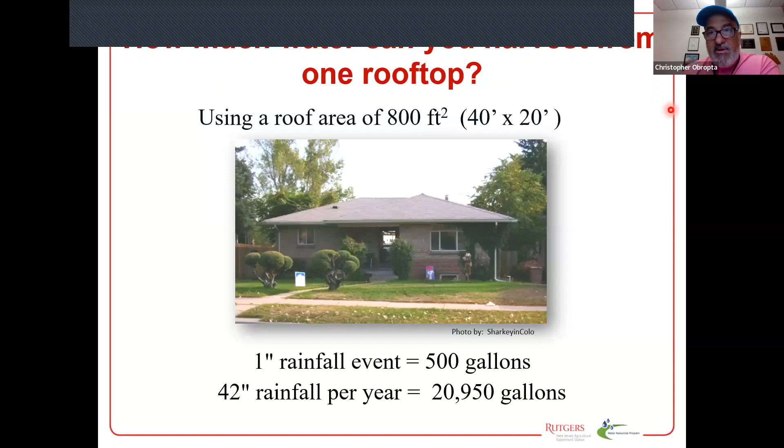We've got Jim in the chat asking about the IBC tote that was mentioned in the video, the fact that it's clear, if there's any specific difficulties with that or other challenges with IBC totes for collection.

Yeah, I think he's just using that as extra water. Usually those totes are in the back of a pickup truck and we're hauling that someplace. We've got one of those here, my group has one. I think it holds, I want to say, 500 gallons, I'm not sure if that's right, but we have one here we put in the back of a pickup truck and take it out to water our projects that we just built.

As long as you're draining that within a couple of days, there's usually not a problem. Once you have water in those clear systems for 3 or 4 days, you can start seeing the algae begin to grow, and that becomes problematic because then you have to drain it down, clean the whole tank out, and that can be an issue.

The other thing is to know the source, because they use those totes for dyes and mulch, and in pesticides too, so make sure you know what it's been used for. That's the other issue - farmers use those, and a lot of times they're putting fertilizer and stuff in them too. You just got to be careful what it's been used for in the past. Obviously you can clean it out the best you can, but it still makes me a little nervous if it was used for dyes or something like that.